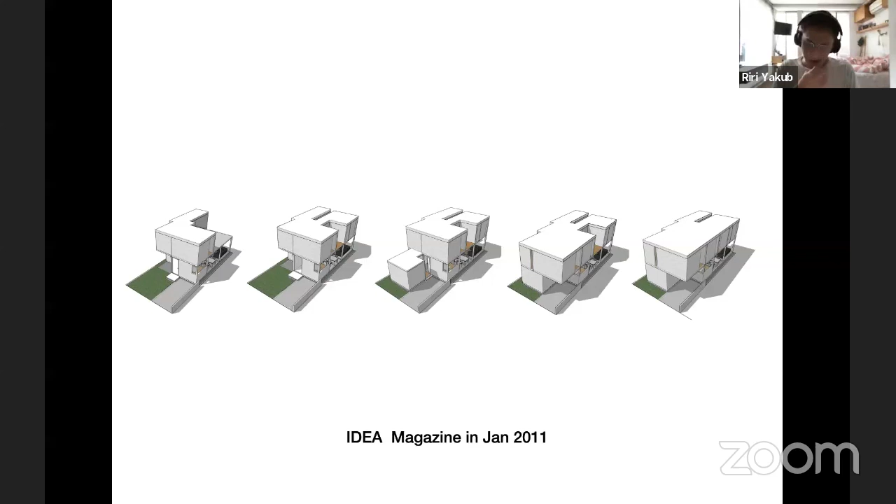Around 10 years ago in Indonesia, prefab construction was still considered quite expensive compared to conventional construction like this. One of the reasons is because the labor cost was way cheaper back then.

So this is my house. Actually, for the floor, we were using composite ceramic modules, while the walls used plaster wall panels. We call it gypsum panels in Indonesia.

And then this is what I call Rumah Nero, or narrow house. It was built using an exterior fiber cement wall. It was also a hybrid structure.

This one is another experiment using a used container.

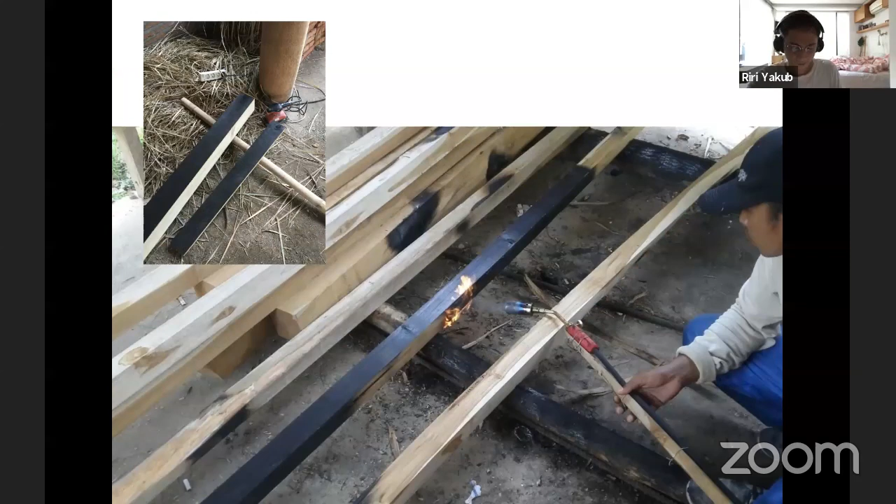To improve the local teak wood, which is moister than the one in Java, I asked the help of local woodworkers there to preserve the wood by burning it, like in more vernacular buildings, like in Europe or Japan, like this. Maybe Takeru is more familiar with this method.

All the wood was sourced from the surrounding neighborhood gardens that people personally collected as their local construction supply. We bought from them to build Kia Cabin and also to share some fortune with the local citizens. So no wood was sourced from outside the local area.

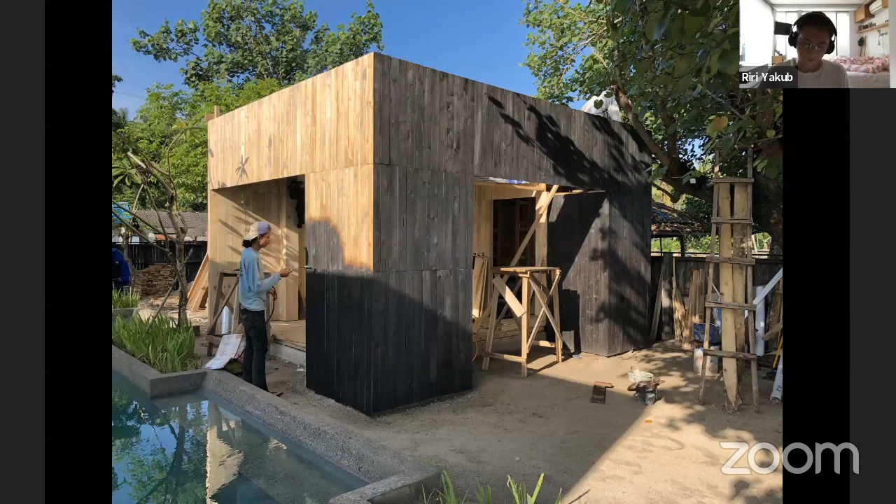So this is the process. Kia Cabin is an affordable bungalow for mostly foreign travelers who want to visit Lombok after their holiday from Bali. Usually that was the route they took.

The site is located by the beach facing toward the north bay, and in front of it you can see straight to islands called Gili Nanggu, Gili Kedis, and others. By the way, in Lombok, Gili means an island.

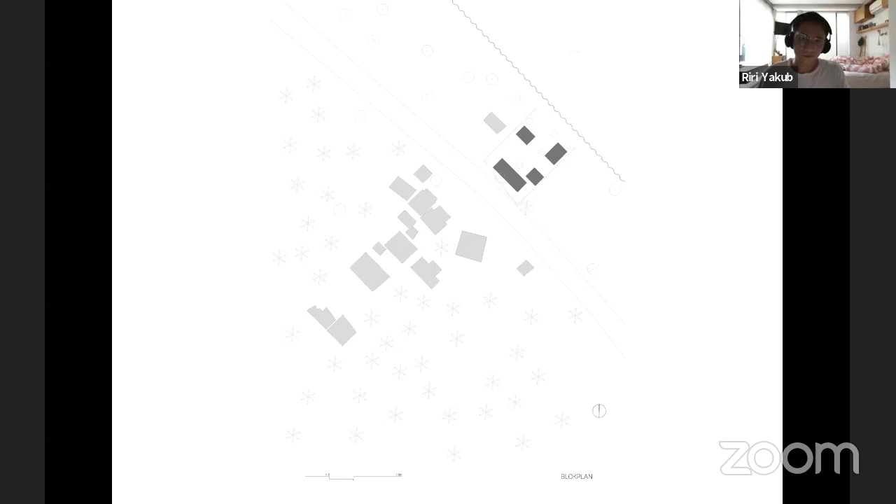The size of the site is only 400 square meters. Responding to the character of local residents' housing, we divided the massing compound into 3 bungalow cabins and 1 restaurant cabin, while in the middle we created a pool as a shared facility.

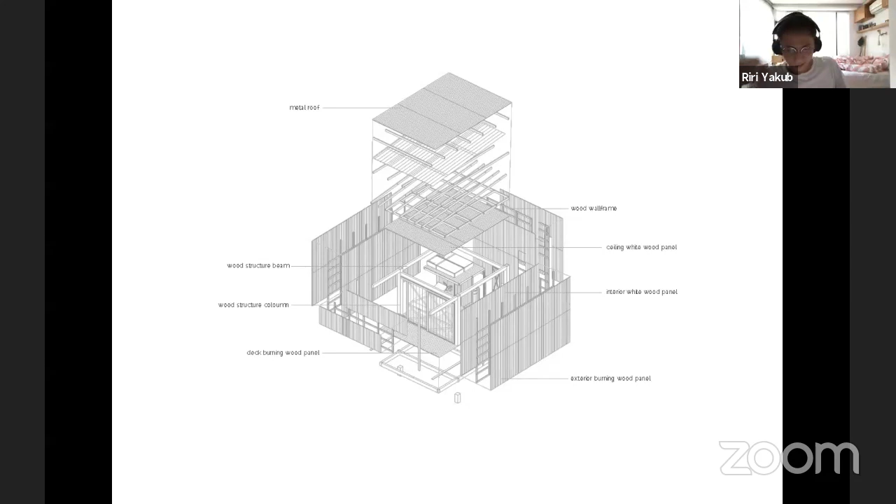Each cabin size is different from one another. We wanted to create a unique spatial and visual experience for each space. This is the first cabin with an attic concept. The area follows the wood piece modules here. Inside the cabin, we have two beds with a mini kitchen and sofa. That concludes the interior area of only 16 square meters.

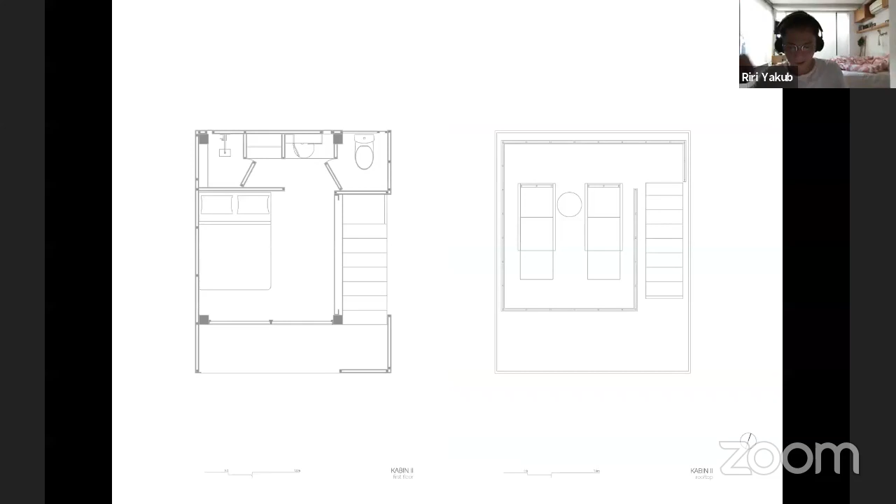This one is a cabin with a rooftop. There's only a queen size bed with a different layout configuration. This cabin has its own sunbathing area on the second floor, the rooftop, for more privacy. Here is the sunbath area.

This one is a cabin with a stilt house concept, or we call it rumah panggung. The cabin is designed on a raised platform to allow visual access from inside. This cabin also has a different space configuration from the others.

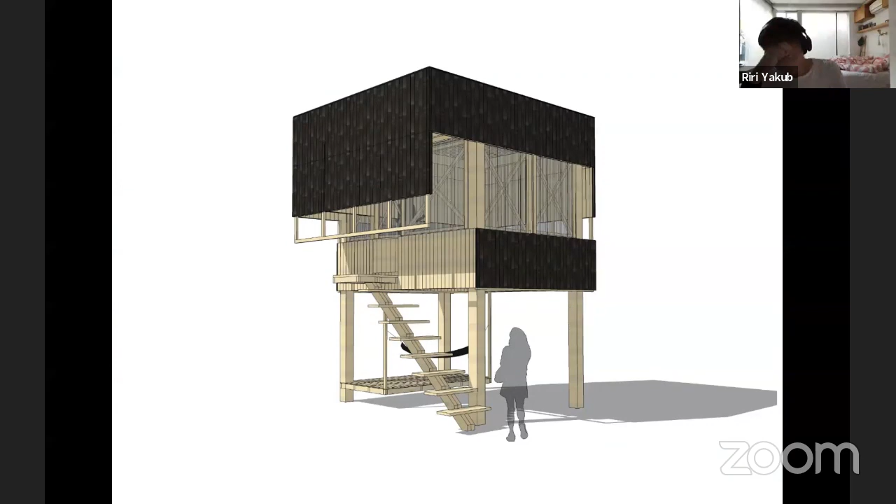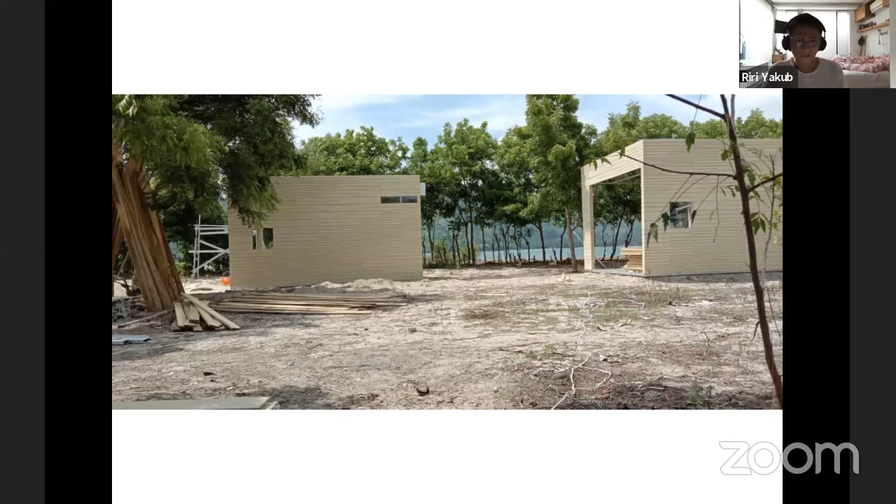Okay, this one is another cabin project that we're currently working on right now at a different site. It's also in Lombok.

Okay, the prefab journey continued at the first Bintaro Design District in 2018. We wanted to use this chance to continue our mission of exploring prefabricated building. This time we collaborated with our structural engineer to create a design system, structure, as well as method and cost to get a better composition of a prefab building solution in Indonesia. It was in 2018, and we thought prefab had become more feasible as a solution to modern architecture today.

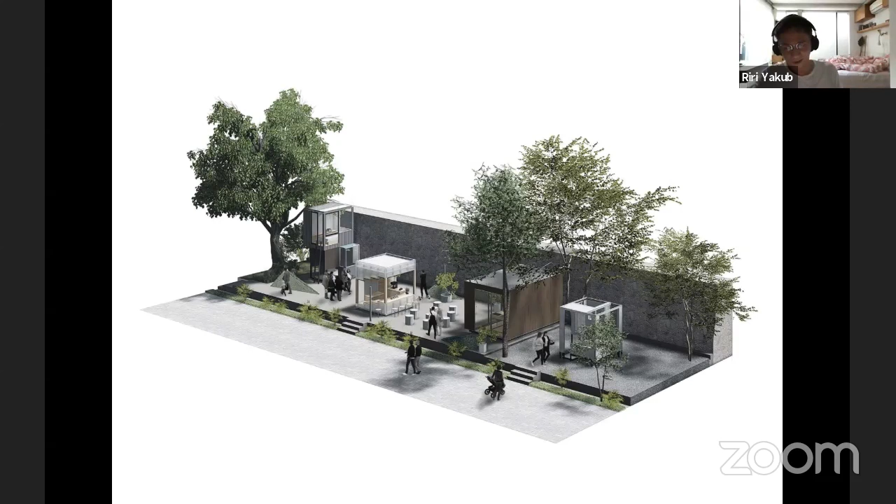And then the year after, exactly last year at BDD 2019, we tried to collaborate with several fabricated material products to be part of our next research steps. We hope that by including them in our research, we can test the quality of those products to be implemented in our construction design method system.

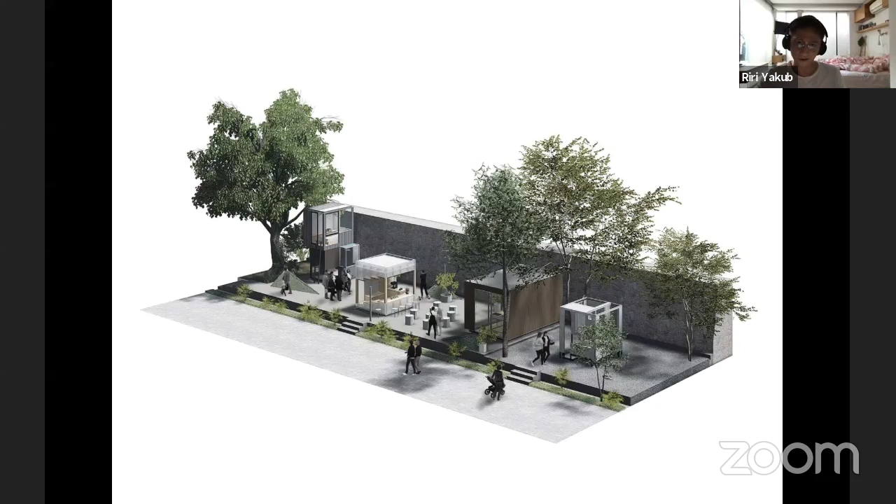This time our exploration expanded to several building typologies, each representing different material identities. This is the first one, which we named Resort. Resort took a model with a size of 16 centimeters as a dynamic configuration in the form of 2 stories. On the ground level was a bedroom, and on the second level was also a bedroom.

The second part we call Retail. This one is designed to be more attractive spatially and materially. It is a redefinition of a pop-up store using a semi-transparent material with a lighting plate to invite people. The small unit uses only one room module.

Last but not least is the Residence, which is the seed of the prefab projects we're currently developing now, or you may know it as ARSIFAB. Here we use 2 modules that show a house living situation with a compact living approach.

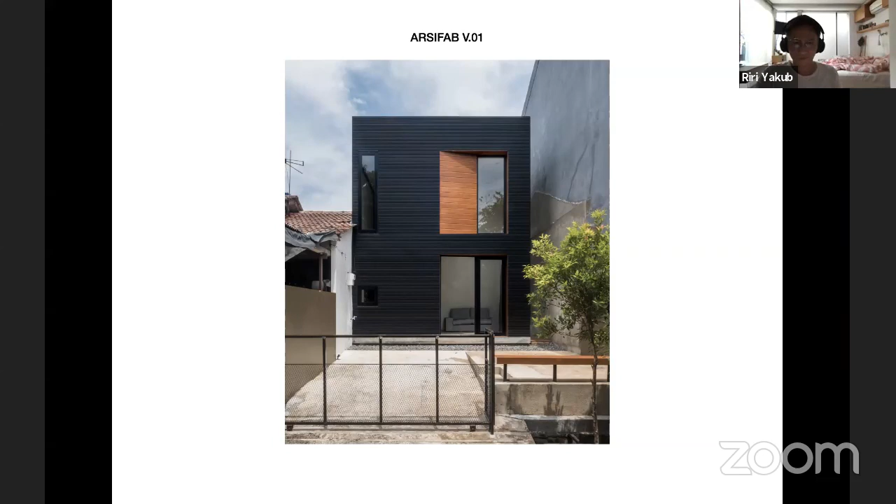And here are some bonus images from our newly completed ARSIFAB project from the past months. This is the first project that we have finished, and this is the second one.

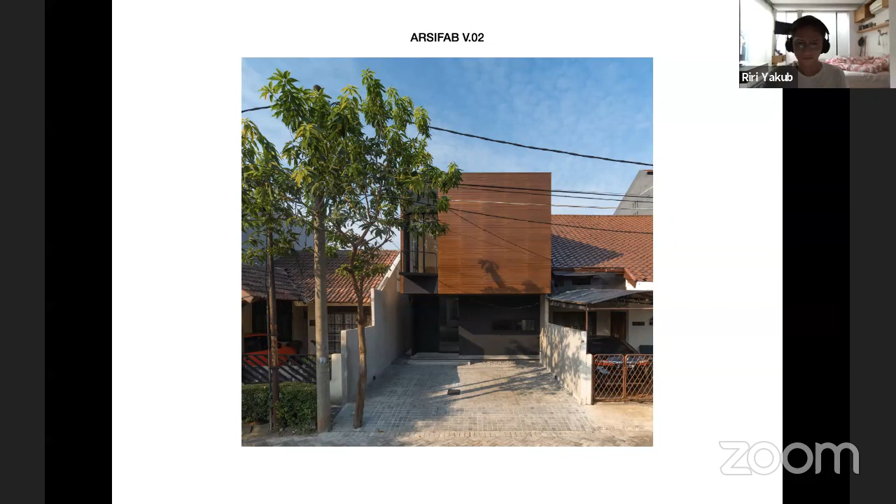Okay, thank you very much.

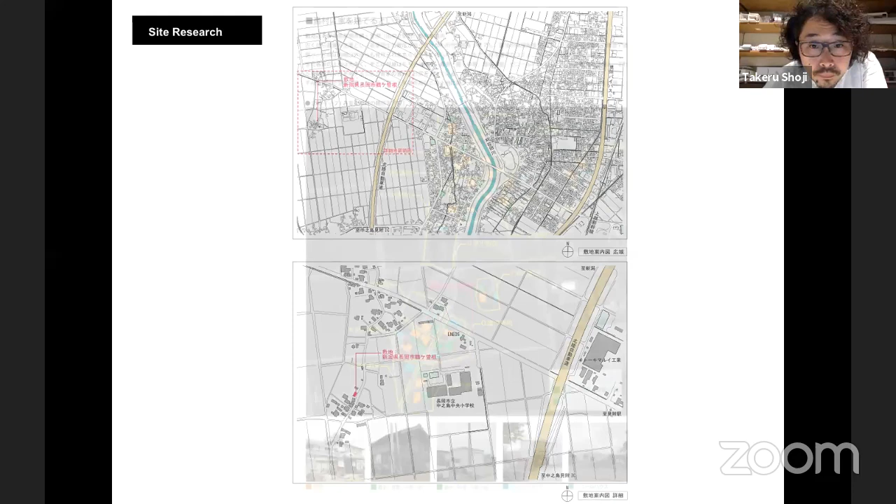I will present Hara House in Nakanoshima. This is the site. Hara House is located in the agricultural village of Tsurugasone in Japan. In this site, each household has a big estate, and one estate has many buildings. A single estate contains an assemblage of buildings and farmland that are interdependent on each other. So this village is facing the same problems that many of Japan's villages are facing: rural decline.

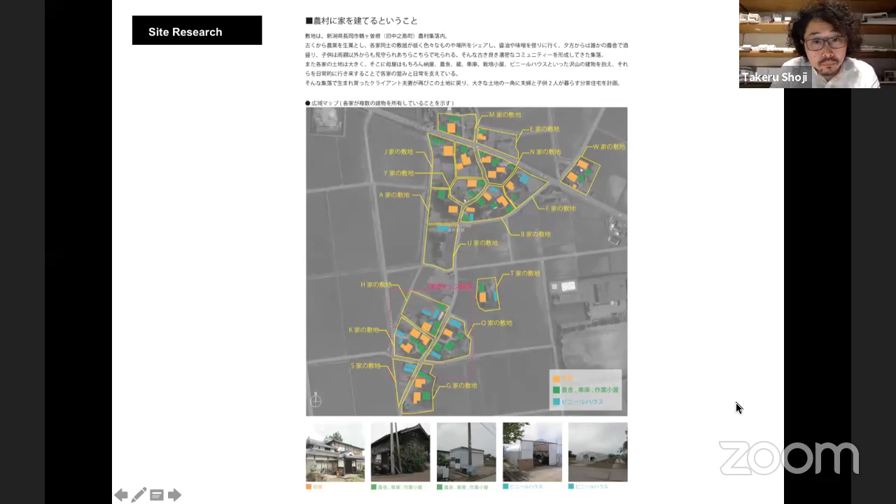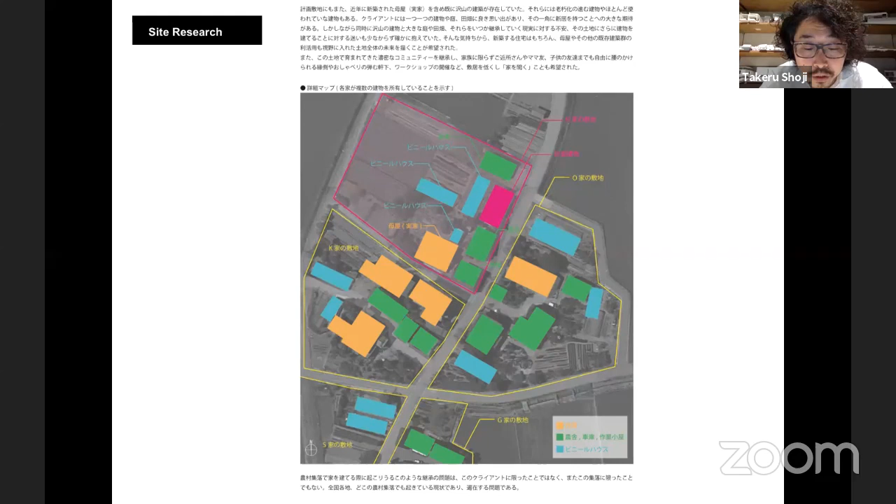Eventually, the client will inherit this large family estate, which already has many built structures upon it, such as the main family house, a work shed, garage, and also a vinyl house. Thus, our design direction was to create a building that revitalizes the structures already present on site and has the potential to adapt to new functions as needed.

We started our design by conceptualizing a small building as an incomplete, remote extension of the main house. The building is not fully self-sufficient and thus draws from its setting, relying on the surrounding buildings to fully function, and even engages the village to create a thriving community.

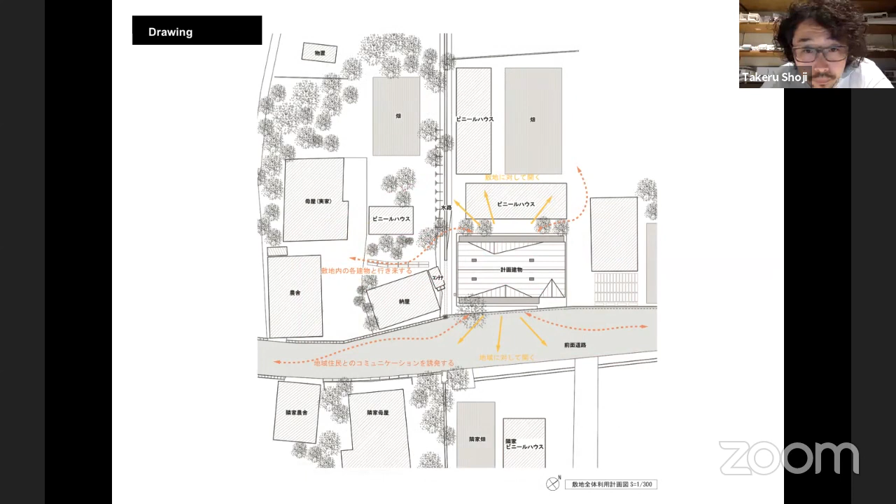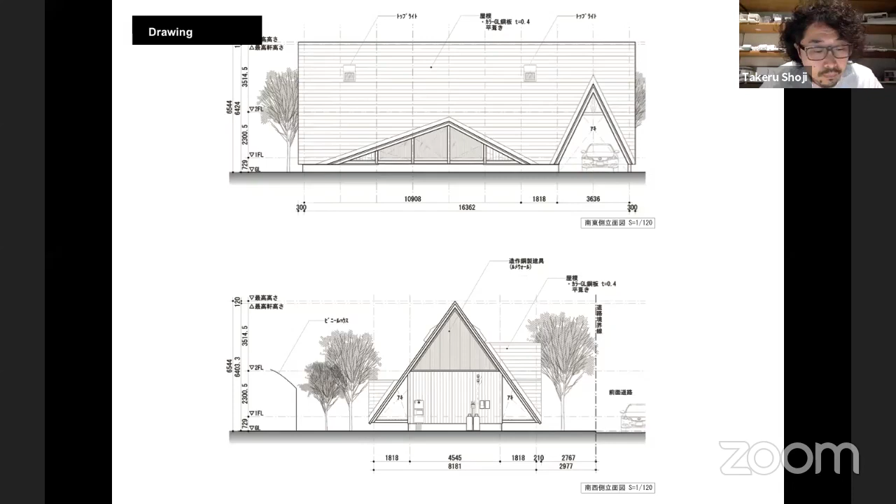We also tried to use a local construction system. This building emulates its surroundings, which has many vinyl houses like this picture and work sheds, and all these architecture buildings use small tiny beams and columns. We also tried to use only 120 millimeter square timber members. All the material for the structure is this small size, 120 millimeter square. And we tried to create a simple truss, an A-frame truss.

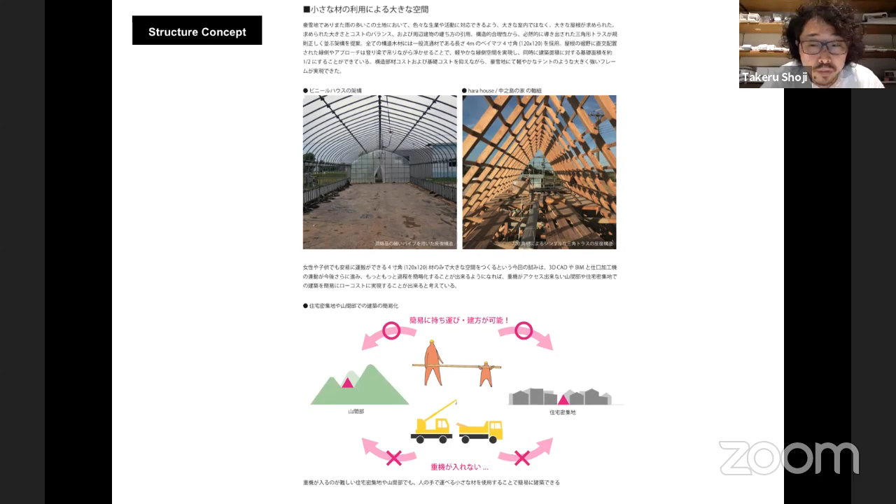In this site, we cannot easily get big beams or big columns. In this site, we can get cheaply and easily this small structure, very cheap. Also, this small material even kids can carry easily, even women can carry easily. It's a very good point to influence how we use this local material. This ability to carry easily is very important.

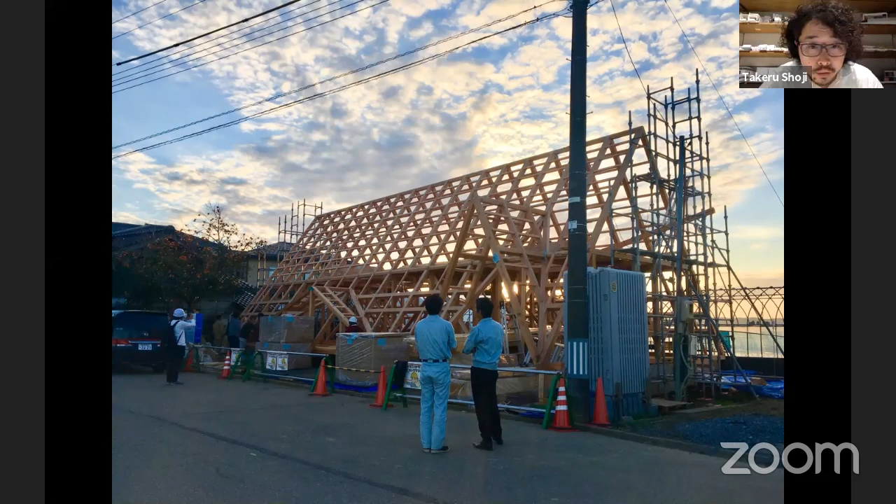This is a frame. All of the beams and columns are made of this 120 millimeter square timber.

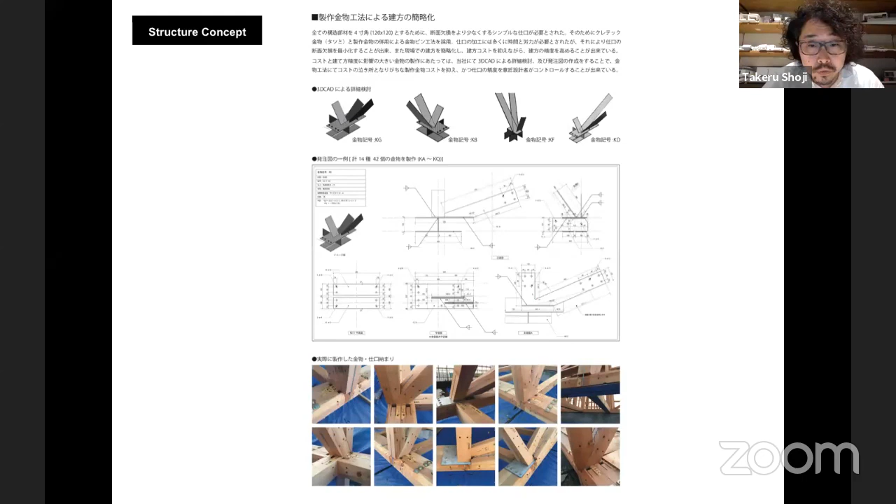This is a detail of the joint. We used this steel plate to joint the small wooden frame. This is a detailed drawing. This is a detail of the joint.

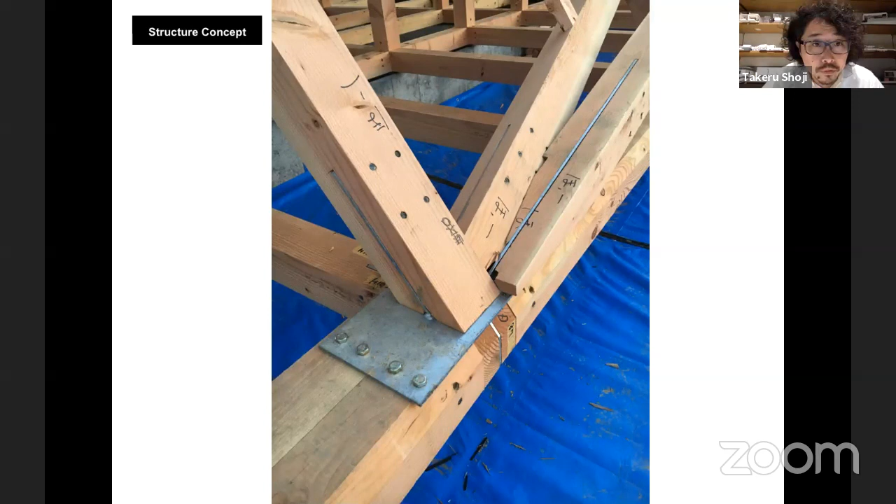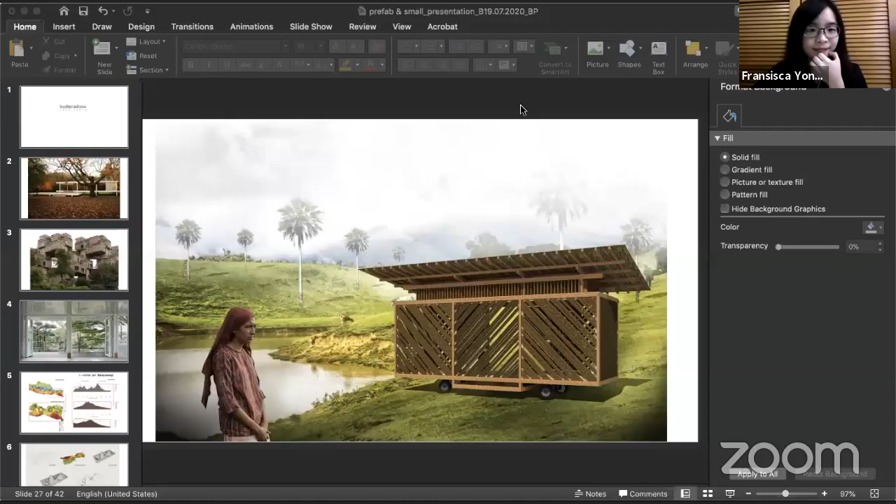I think during the COVID-19 pandemic, it recently put a spotlight on prefabricated architecture. When the hospital in Wuhan was constructed in only 10 days, this created discussion about designing small prefabricated houses to use as glamping units for the MotoGP event in Lombok. I will present 3 or maybe 4 prefab projects that are small in terms of scale, yet quite challenging due to the location. Hopefully this presentation can inspire everyone.

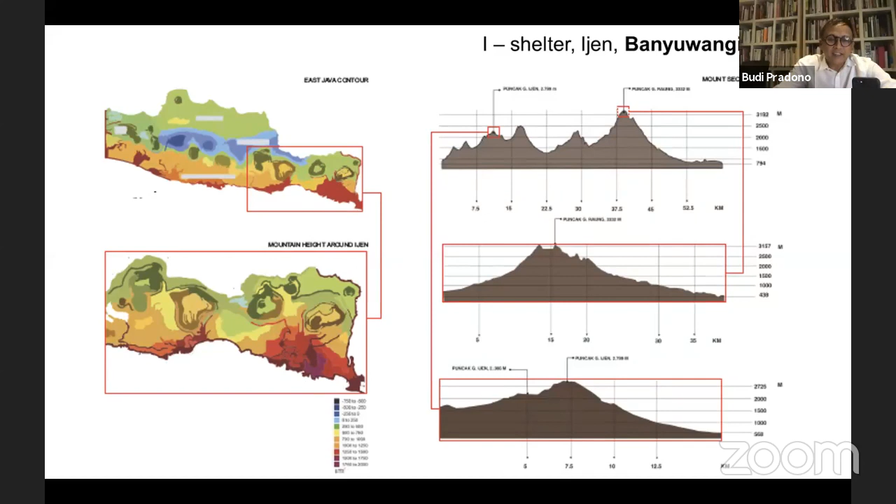Compared to the Ijen area, 2,500 hectares. This place is 30 minutes from Bali, in Banyuwangi. So the idea is actually how to map the several mountains surrounding it, and making architecture for it. So after the mapping, then we can transform it into architecture.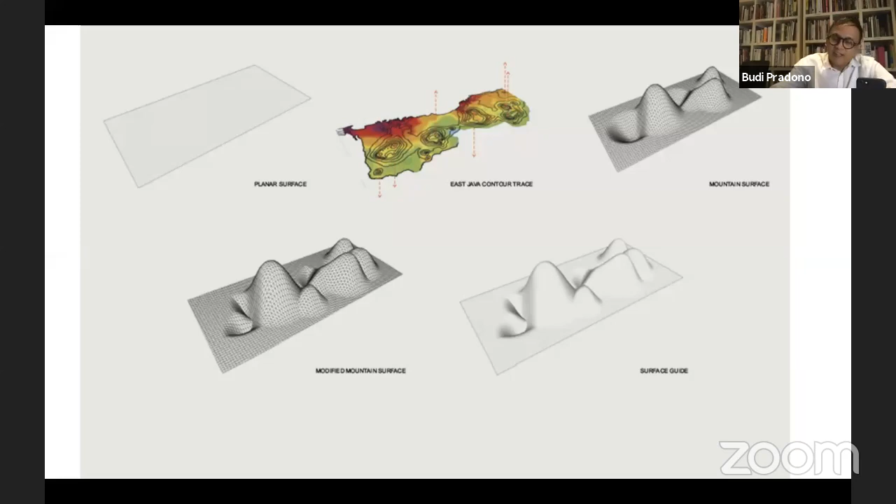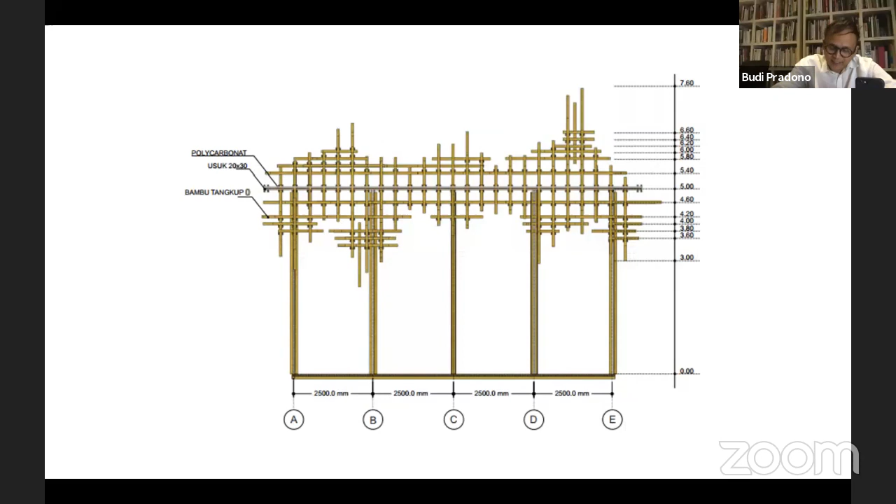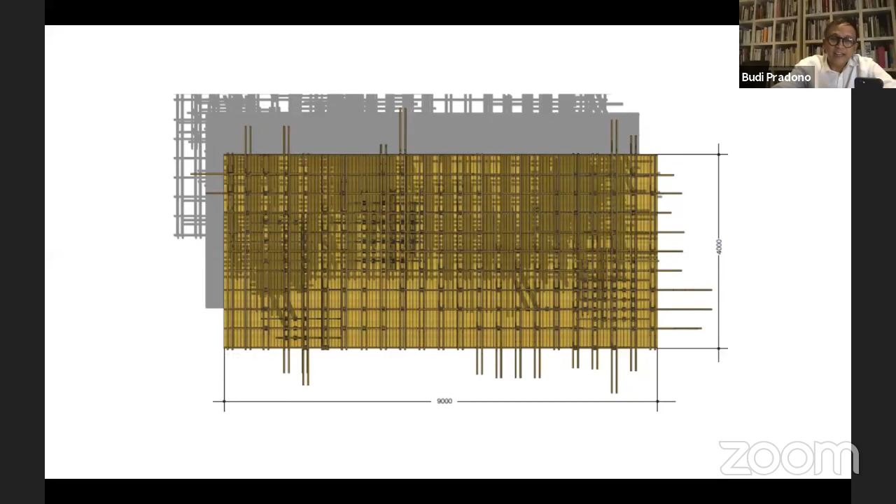My idea is stackable bamboo plates, which are not assembled in a factory, but in the village. So every layer is made as a box, and if we combine them together, it becomes a mountain. This is made independently by the people in Kintangan, in Desa, one of the villages in Banyuwangi. Then if we stack them, it creates the mountain.

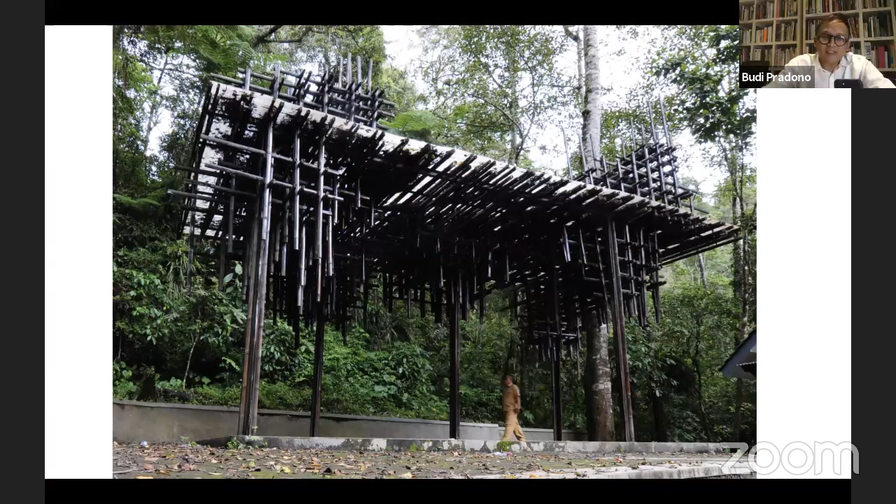So this is the result. This is only a tourist area for the bicycle competition in Banyuwangi.

So it's prefabricated, made by people. The material is from there, so it's part of the nature.

The next project is a cabin unit in Atambua. Atambua is located near East Timor. I lived there for around 4 months. The terrain there is savanna, and palm trees are used for many different things.

So it's very different from the Java area. This palm tree, called lontar, is a very interesting tree because people use it for all kinds of their lives.

In the building material store, I can also find the palm body and the leaf used for their own architecture. So I was thinking to create new architecture with this kind of material.

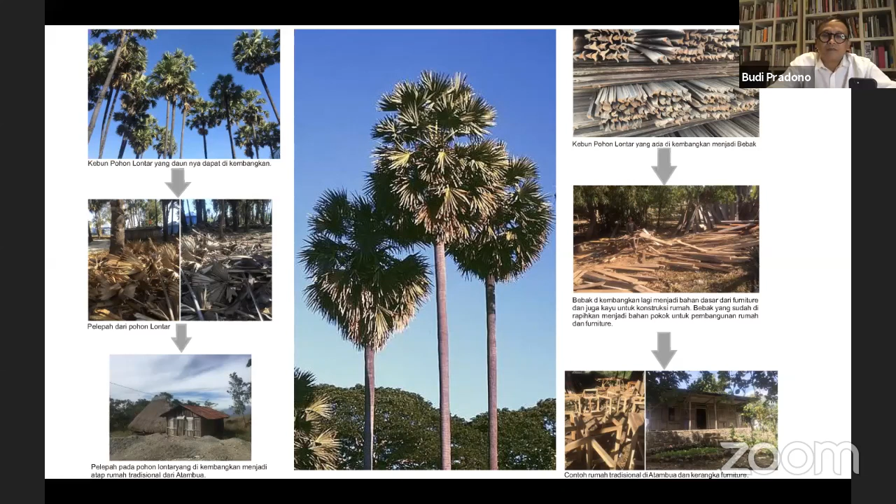We can see surrounding that many people use it for the wall, for the roof, and even the fruits. People drink it.

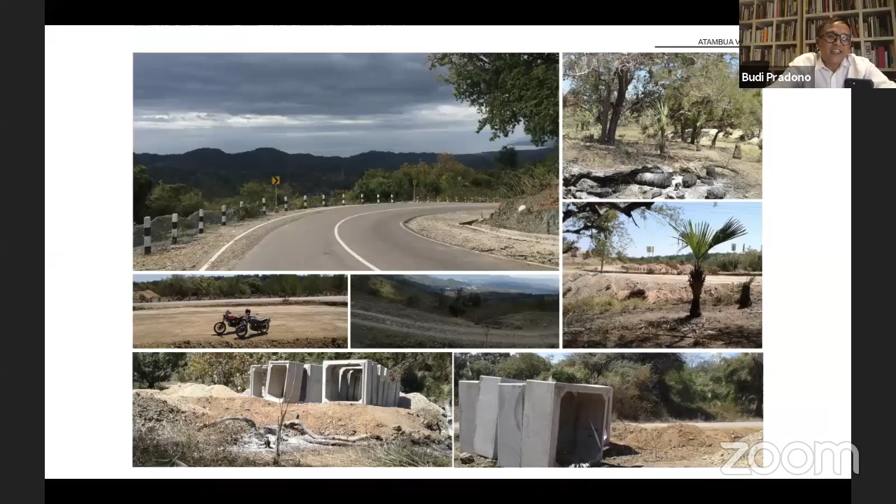This idea came when the infrastructure was made, they actually had leftover concrete. Then I designed these small things into small living spaces for people working there.

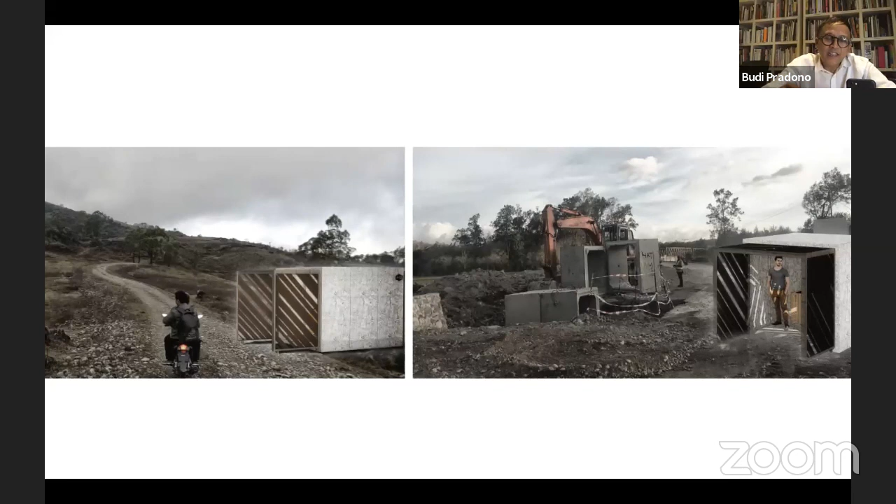They just put that using the leaf of the lontar palm trees as partition. So only small things are important.

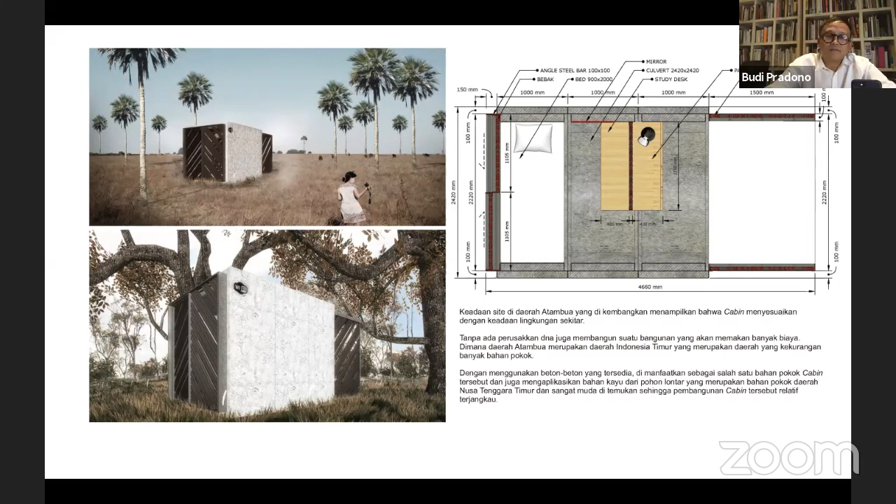The second thing is we call it a cabin. The size is 2.5 meters times 6 meters, approximately 15 square meters.

I imagine that everyone in that region can make it themselves. Some people make the windows, some people can make the structure. The main structure is the wood that they have.

And we put a kind of wheels in the way in order to avoid permit from the government. If we put the wheel, that means this is like a temporary building, so people can make this for an Airbnb cabin.

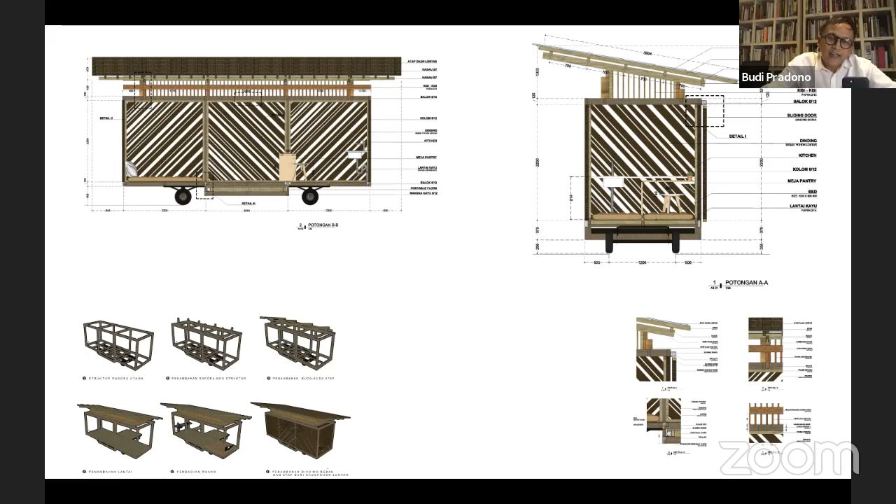So this is very, very small, but it's separated with the toilet. It's only for sleeping and a small pantry.

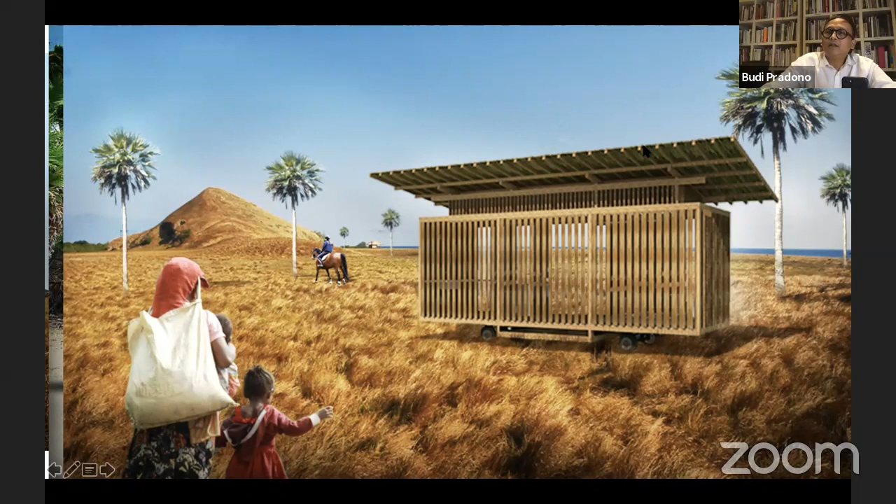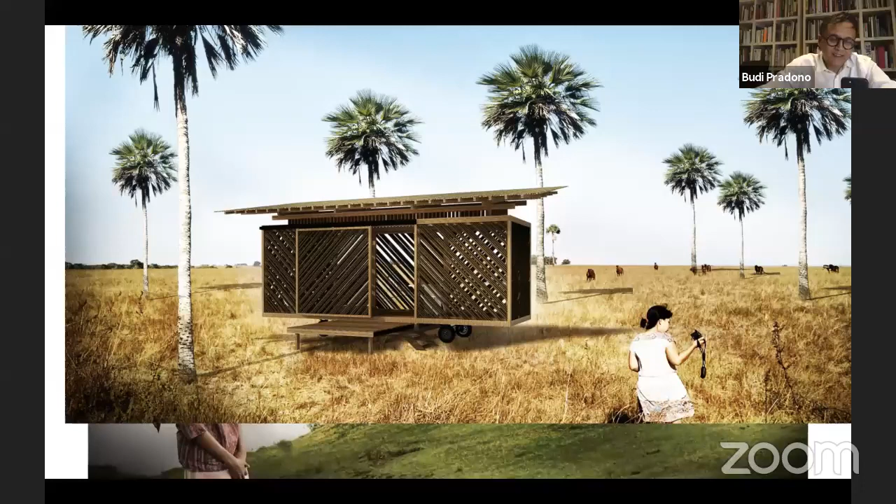You can see the wall is made of what we call Bebak. Bebak is a traditional part of this lontar palm tree. The other one uses local woods that we can find in different areas, in the mountains or on the beach.

So this is the toilet unit, which is separated and also floating from the ground, using similar material. We can use a modern toilet, but we avoid water because water is very hard to get there.

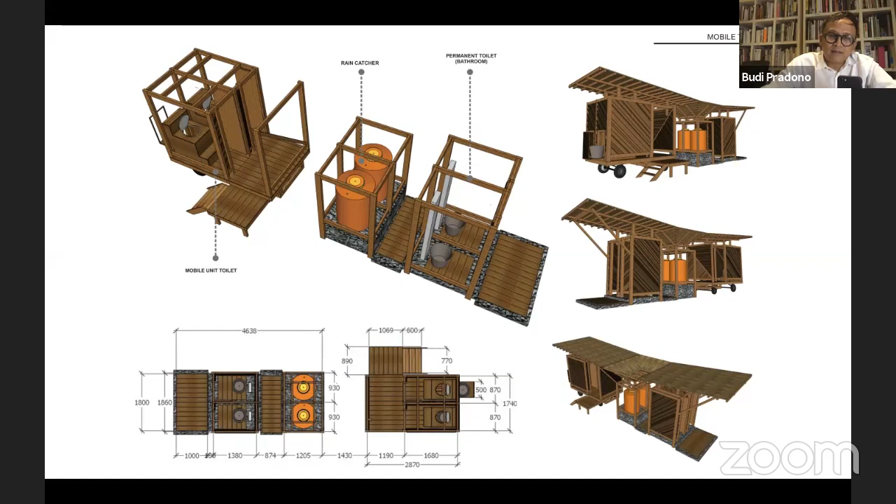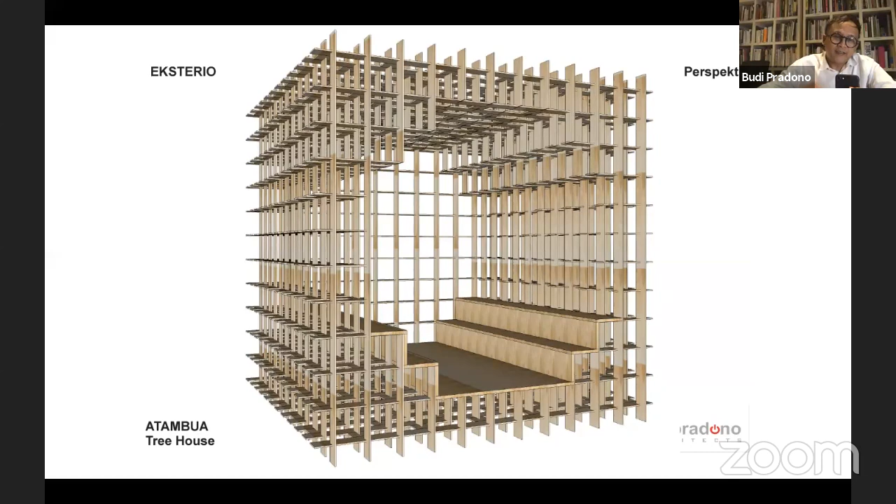So this other one is a very small one, we call it the Atambua tree house. We got the idea from the Woloan building in Sulawesi area, because they use slate wood as their wall. I imagined if we used the existing wood, we could create a contemporary tree house.

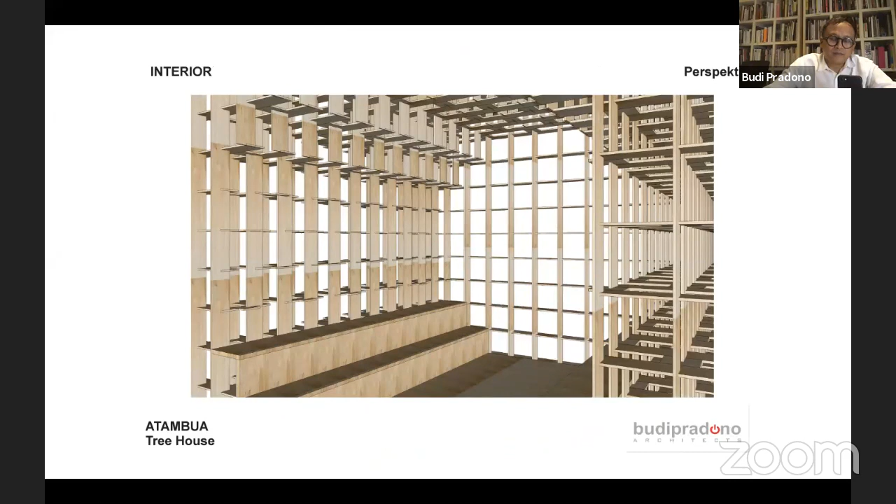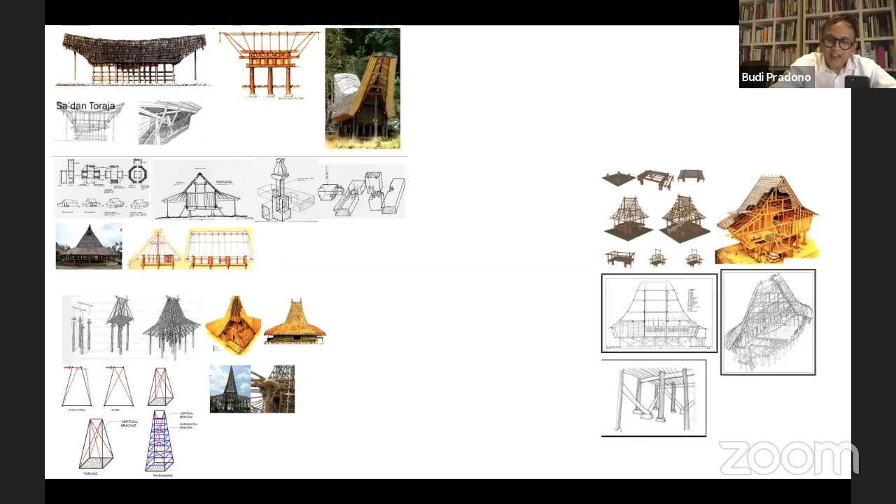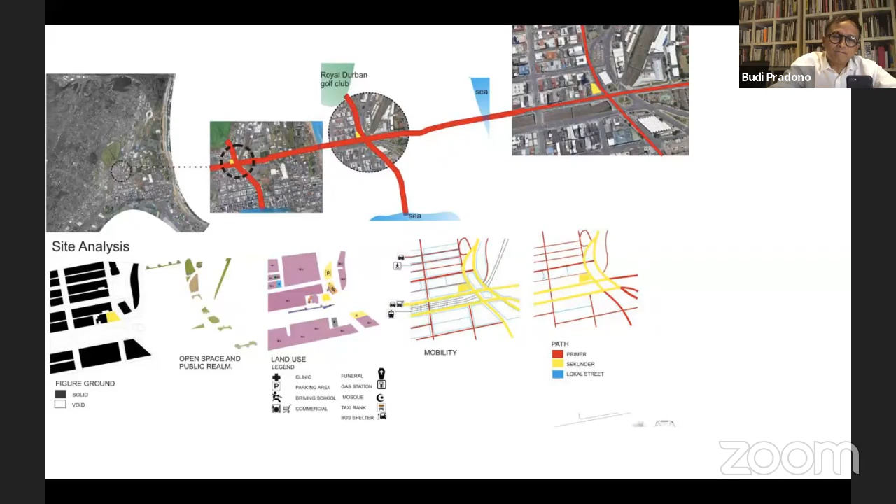So this is the site in Durban, how we make like 8 floors of buildings. It's a housing project.

The idea is making an interlocking honeycomb structural system, consisting of laminated wooden beams measuring 30 centimeters by 30 centimeters, connected to each other.

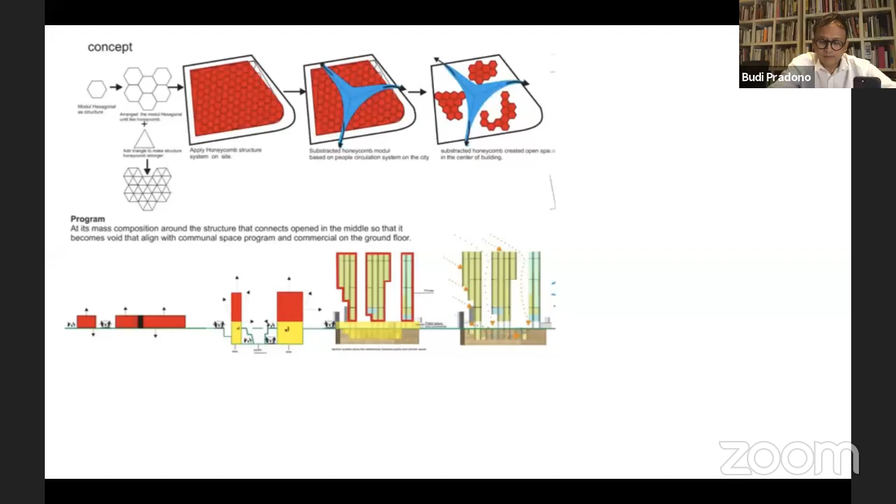And if we combine every honeycomb, it becomes new architecture. We define this combination as 1 unit, 2 units, 3 units, with elevator and corridors.

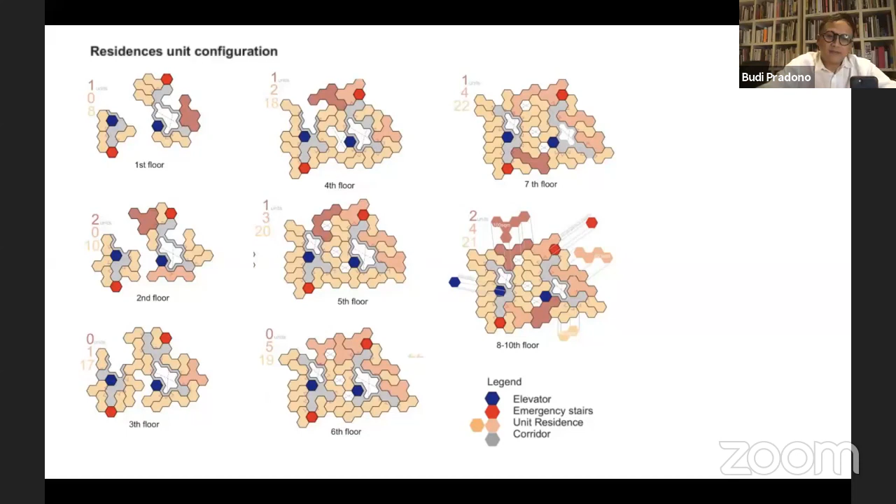So timber construction has been used for centuries. However, intensive research and development brought new prospects of manufacturing timber, which provides architects and builders with the opportunity to create new ways of laminated timber.

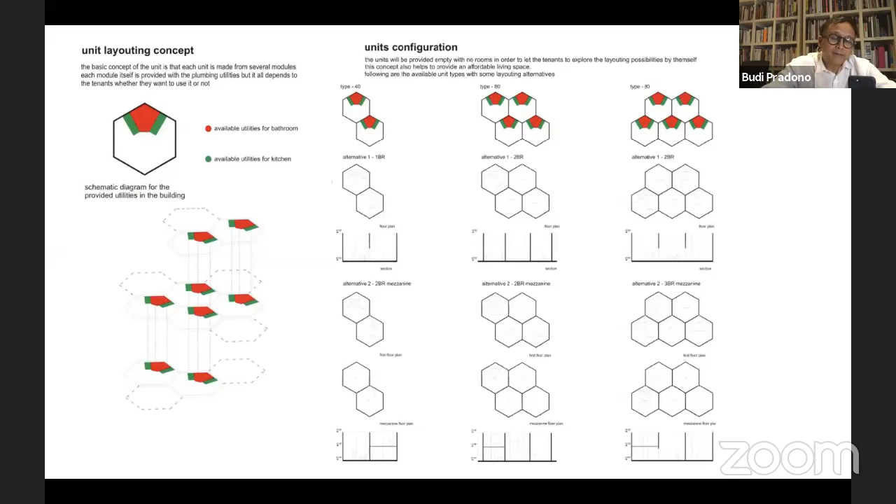Actually, in South Africa, we made a model study to connect each structure into a bigger structure.

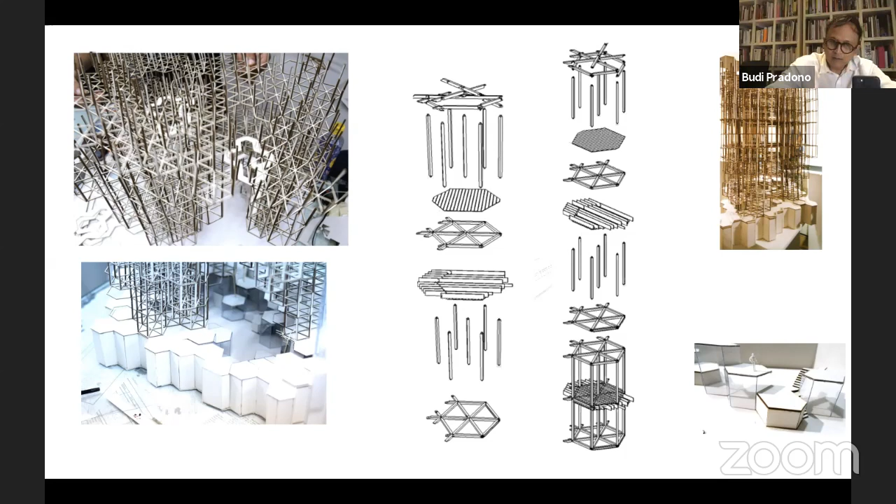In Europe, timber is also a renewable resource, because in a country like Austria or Eastern Europe, they can grow it every single day.

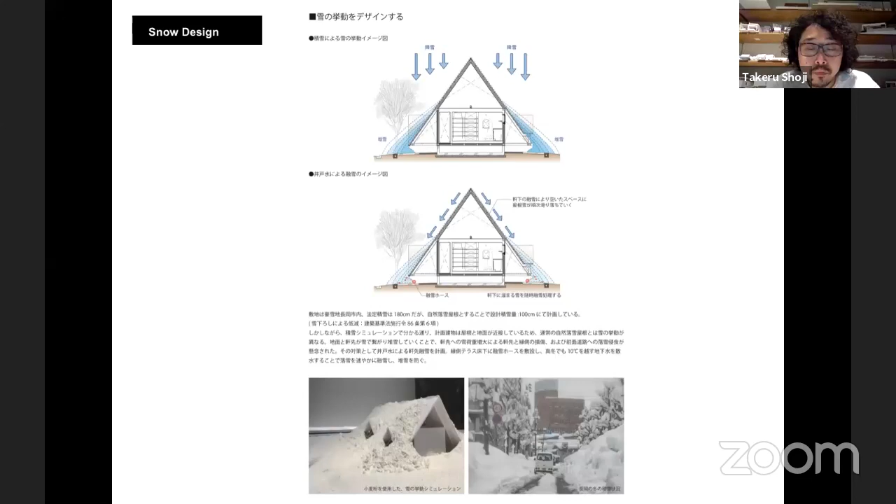This slide shows how the snow behaves. We made a small house and covered a big shed, a big hut, using an A-frame truss. In winter, if we get a big snowfall, this housing looks like that, but life itself is still safe because of this big hut. This big hut, this big white hut, is made not by wood, but by galvanized steel plate.

And this big hut is very useful to save from snow, and also from strong sunlight in summer. So in winter and in summer, the life in this house is quite nice, very comfortable. Is it enough as an answer?

We also have the second question, also for Mr. Takeru, from Gasani Amalina. He said it is a very interesting presentation about Hara House. The question is: what is the cover material in Hara House, and how long was the Hara House built?